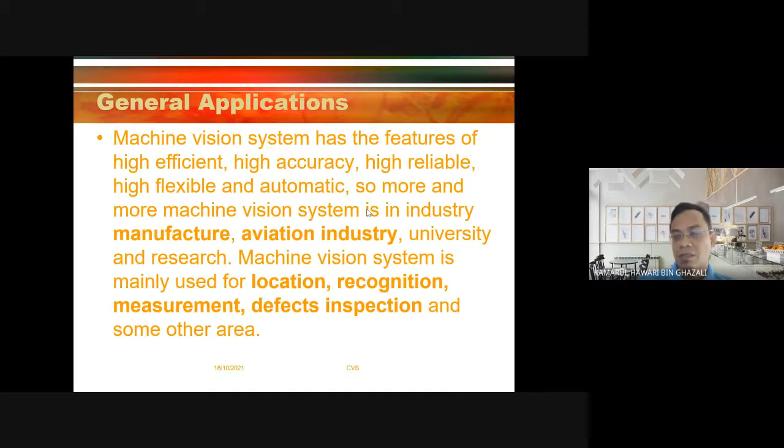So it can be used in manufacturing, aviation industry, automotive, as long as the task is to replace a human eye, there is a place for machine vision system technology. So that is the basic idea of a machine vision system.

So let's take a look at this industry, semiconductor industry. Malaysia can be considered one of the manufacturers, or semiconductor producers, in the world. So during this COVID-19, the products that use semiconductors are having a problem of shortage of the chip, because like in Malaysia, these factories were not allowed to operate for maybe 3 to 4 months.

Just recently, the government lifted the restriction for the semiconductor industry to operate, even not only semiconductor, but all the other essential manufacturers or factories. So during that 3 to 4 months of shutting down the operation, the world faced a shortage of the semiconductor chip, of any semiconductor.

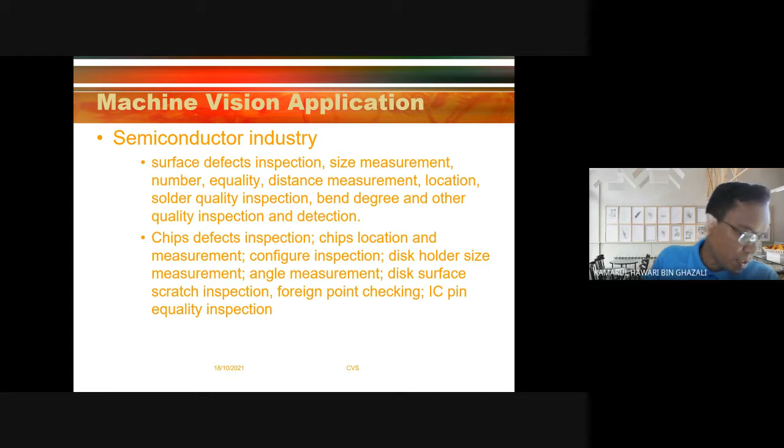Last week, I showed you the glassware, or the plate. The tableware, plate, 'pinggan' in Malay. I showed you last week. In 1 day, for 8 hours, they produce 8,000 pieces of the plate per day. 8,000 pieces, you just imagine who is going to buy that plate, 8,000. Are they all going to eat off the plate or what? But that is the situation, I mean we don't know. Some industries, we have no idea how they operate. But this factory, they're producing the plates, 8,000 pieces per day.

So the majority of their process is manual, because this factory has been operated since 1940, almost 100 years ago, but still alive till now, still makes profit, still people want to buy this product, Claytan. If those like to buy kitchen accessories, so you should know the brand Claytan. But they don't want to go automatic because they still can rely on manual human labor from Indonesia, Bangladesh, India, Myanmar.

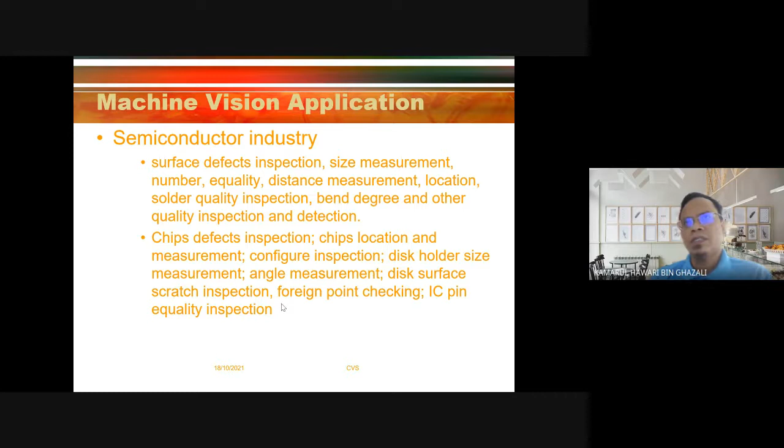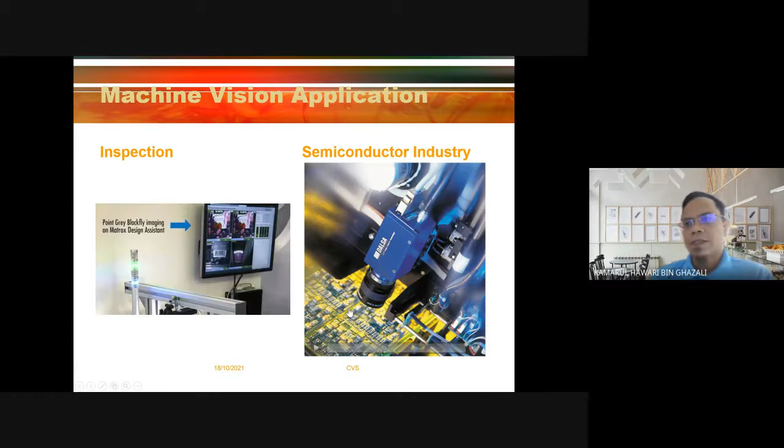So if you look at this video here, you can see - oh, cannot play. So you can imagine this board, a PCB board, right? This PCB board is inspected by a camera, and then very small and tiny defects can be detected by the camera.

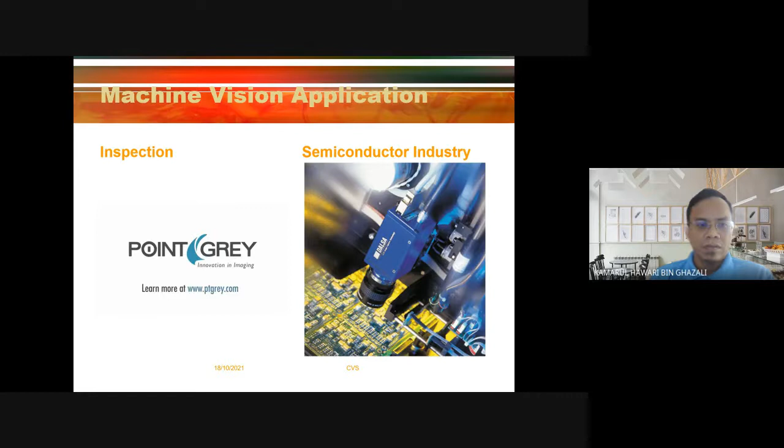So this is another example. It's not only in semiconductor, but since semiconductor is considered a high-tech industry, the factory needs to invest in order to meet the number of products per month, because it is high volume. They must invest in technology, they cannot rely on human labor. You have to have a machine, a robot, any kind of technology.

The semiconductor industry needs to invest. So next is the food and beverage industry. This is also an industry where they have this kind of application. Industries like Nestle - Nestle is very big, they are producing products, so for quality inspection they need to have this kind of machine.

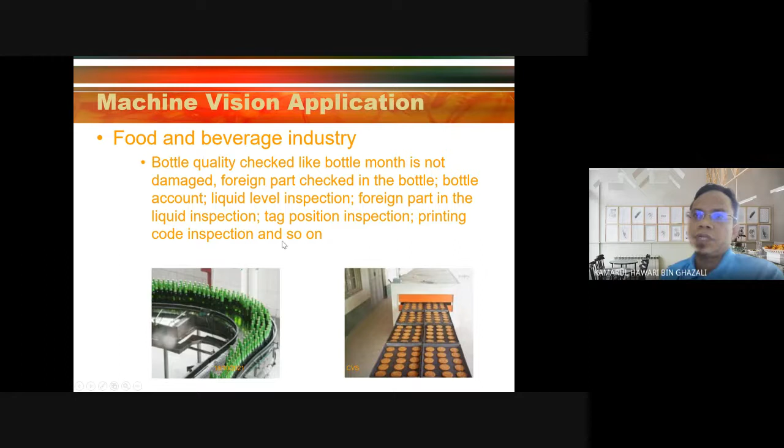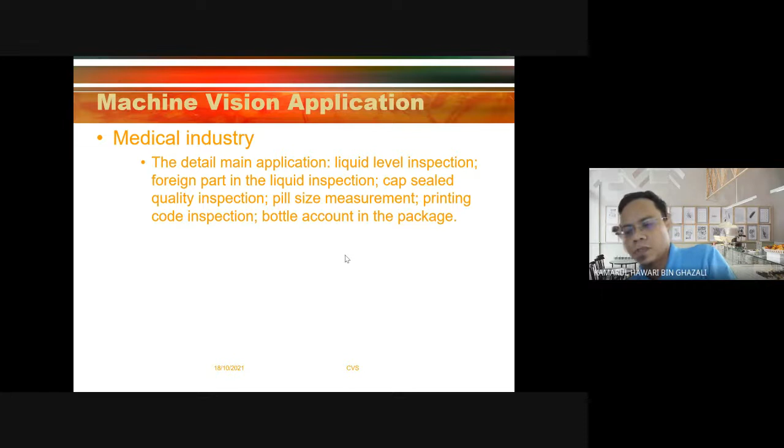So here are examples: bottle quality check, foreign part check, bottle counting, liquid level inspection, cap position, printing code inspection, and so on. In the medical industry - meaning the industry that produces medical and pharmaceutical products - they are also using this kind of machine vision for pharmaceuticals.

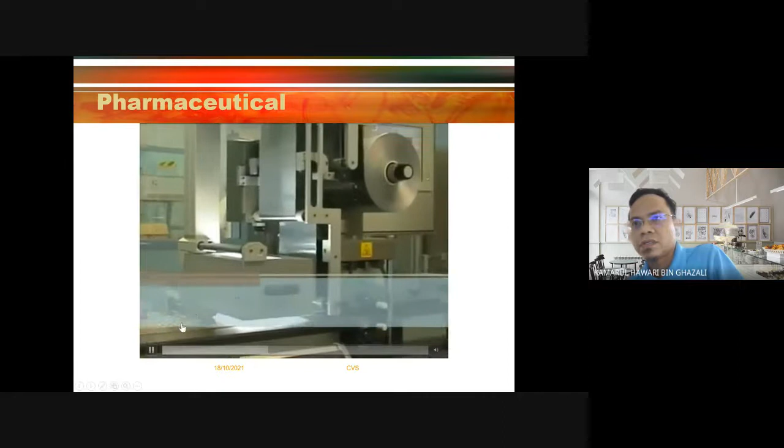So this is the blister inspection system. They do the inspection to ensure that all tablets are in the blister. Why is it very fast? Because they need to produce, for example, in one day 1,000, 10,000, 20,000 blisters. So they need to have a machine or technology to do the inspection. Otherwise they cannot, they will sell low quality.

Since I'm involved with a company in Shah Alam, an automation company, I can see there are a lot of opportunities for industry to use machines because they are still relying on manual methods. But the big international industries like semiconductor, they already use vision systems. The small factory, small medium enterprise SME, for example vendors for automotive, they are still using manual. They don't want to invest, or they don't believe in the technology.

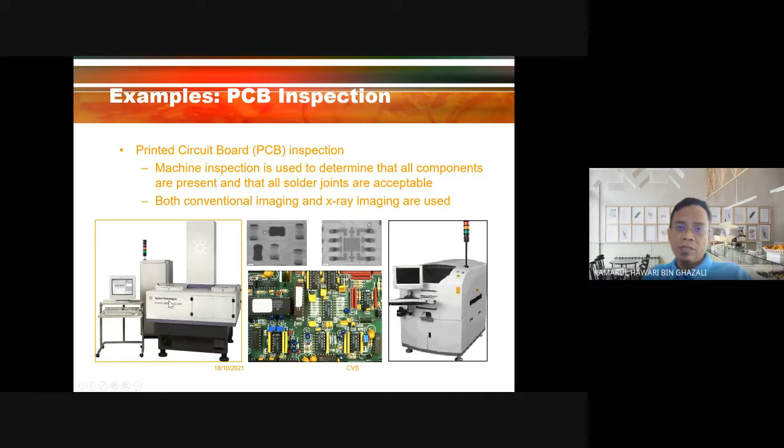Okay, so this is another application. Just now it's application in industry, you can see a lot of applications in industry. Even some industries are still new, or some industries only exist in Malaysia, for example oil palm, sawit. So there is no available technology in the market because the industry is only in Malaysia or Indonesia, right? There is no oil palm tree in Europe. So that's why the technology needs to be developed by the local company.

Last 3 weeks before the border opened, I was invited by Sime Darby, one of the oil palm producers in Malaysia. They called me to ask if I can develop a system to automatically spray herbicide, racun, in their plantation, because they have a labor problem due to COVID.

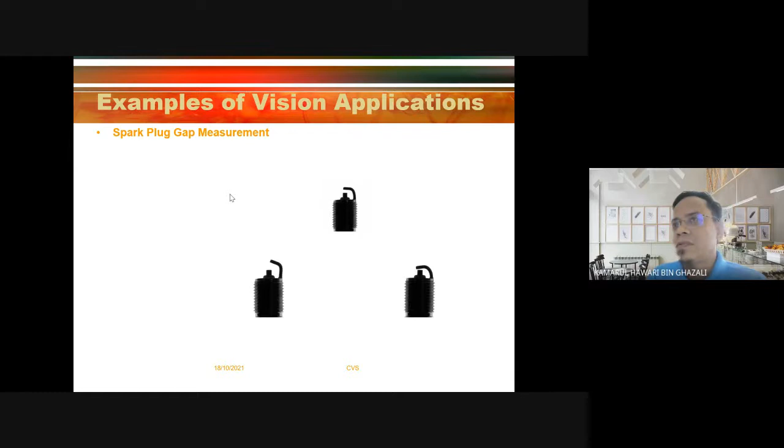But if one day you are working with this machine vision, at least you have something from this subject. So this is another example - spark, detect the gap, PCB inspection. So this is all done by the machine.

So what is the benefit? Of course there's a lot of benefit you can think of by common sense. When you rely on humans, there are a lot of problems: accuracy, productivity, not coming to work, being lazy, and so on. When you rely on machines, machines don't need to rest - they are designed to work 365 days a year, non-stop.

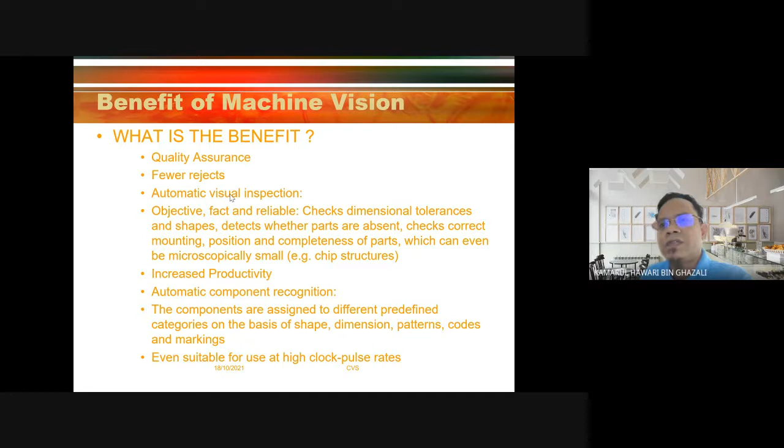So that is the benefit: quality assurance, fewer rejects, automatic visual inspection, increased productivity, automatic recognition, even suitable for use at high clock-pulse rates, and very fast decision-making. Okay, a lot of video.

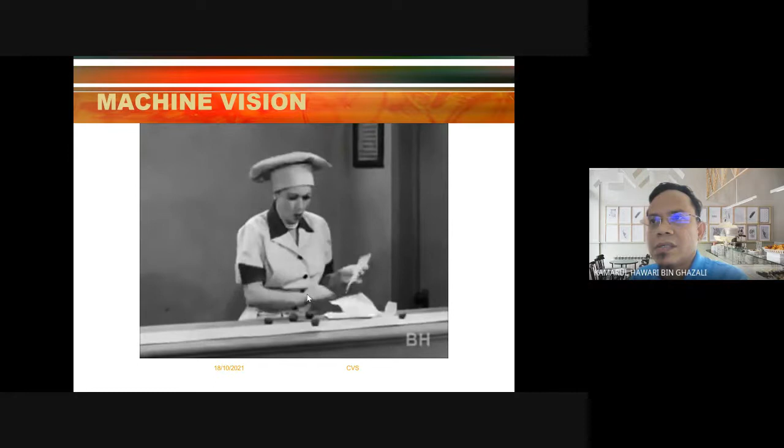So this is another video to show you, to make you understand the application of machine vision. So this is a problem when relying on humans.

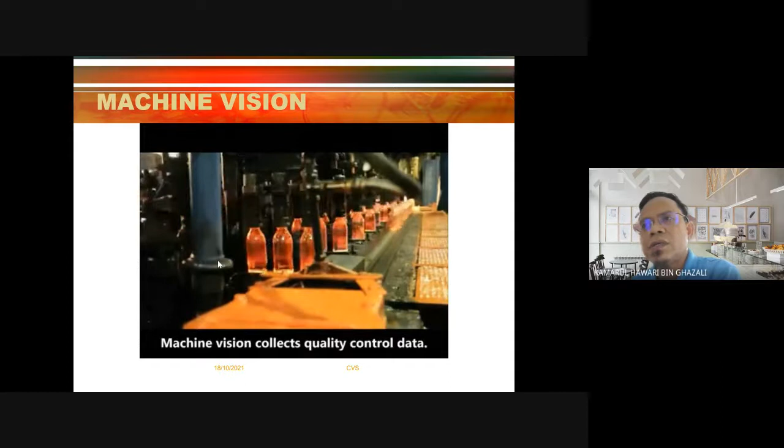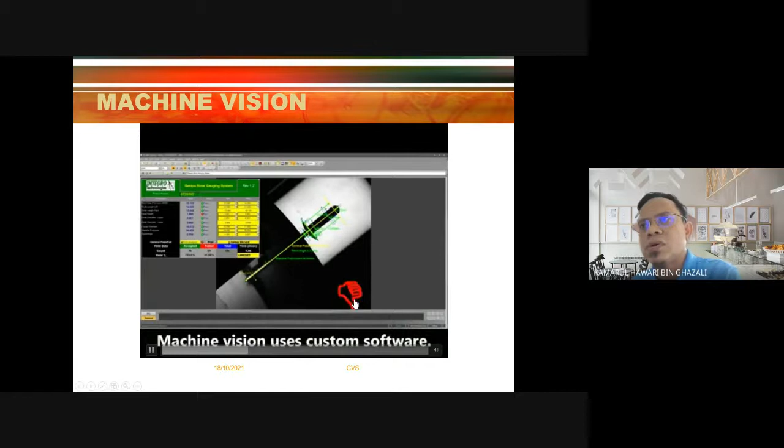Integro Technologies - a lot of companies use cameras, robotics, software. Machine vision collects quality control data. So this is automotive - check and collect: good, not good, good, not good, good, not good. Can inspect labels, labeling.

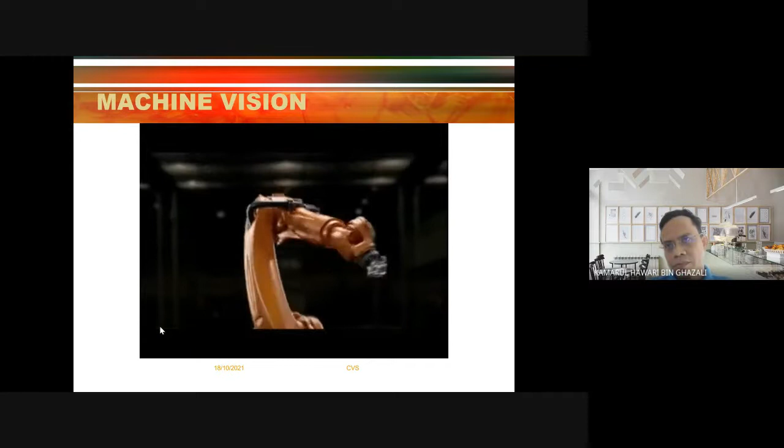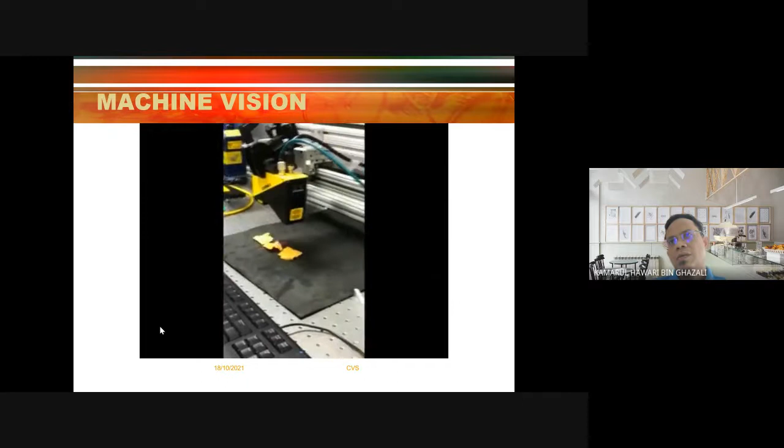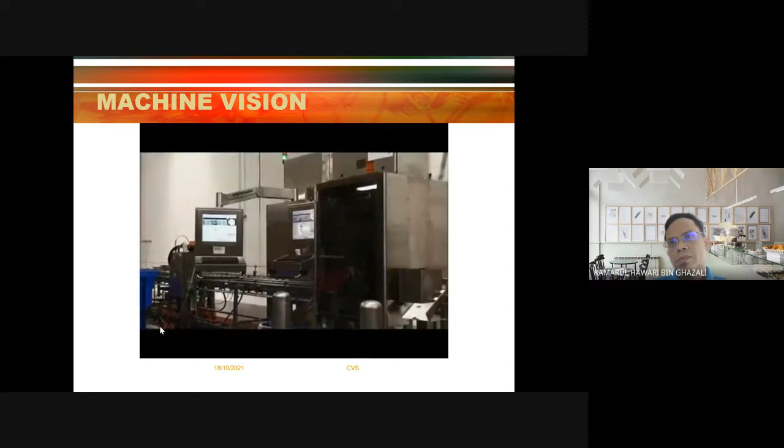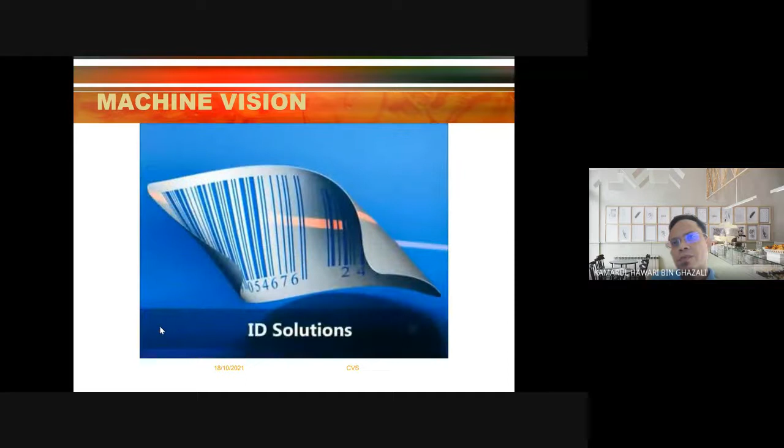So this is a company who provides this technology - Kuka in Germany. So this is an example of what a company can do.

So computer vision is research and fundamental technology for extracting meaning from images. Machine vision is factory application. Embedded vision has thousands of applications: consumer, automotive, medical, defense, retail, gaming, security. So this is in automotive.

In a 2012 study conducted by the IIHS, they found a 7% reduction in crashes for vehicles with a basic forward collision warning system. In automotive, car manufacturers put a lot of vision technology to assist the driver. When you drive, that camera will assist you because humans have a lot of problems, right? So they need technology to assist.

Even they are very lazy now - that's why car manufacturers invented autonomous cars. They want to relax. Okay, so this is in automotive.

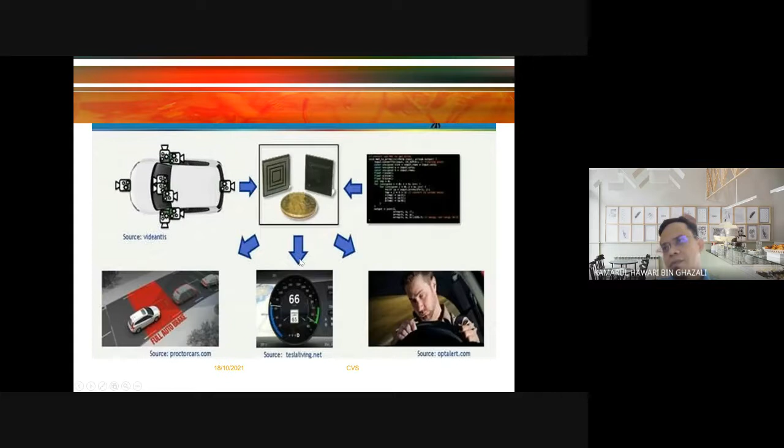Okay, this is the Mercedes punya. You want to see what is the technology in the Mercedes where they use traveling and working at the same time. In the new S-Class, passengers have the option of enjoying a completely new level of comfort.

Mercedes-Benz now offers Magic Body Control, a world premiere thanks to the first ever predictive suspension system. The unique aspect of our predictive suspension system is that we now use stereo cameras to scan the road surface in real time up to 15 meters ahead of the vehicle. This function is known as the road surface scan and truly is a world premiere. We're the first to do this and to do it in real time on board. It's never been done before.

The stereo cameras measure the height of obstacles with a precision of 3 millimeters or better, and at speeds of up to 130 kilometers per hour.

In the second step, the measurement data defining the exact road profile is passed on to the suspension system, and thus the active suspension system knows ahead of time which bumps it's about to drive over. They can adapt so that the body glides far more smoothly over the road than a conventional vehicle. As such, the suspension system can actively compensate for uneven surfaces. This prevents the body from oscillating and vibrating.

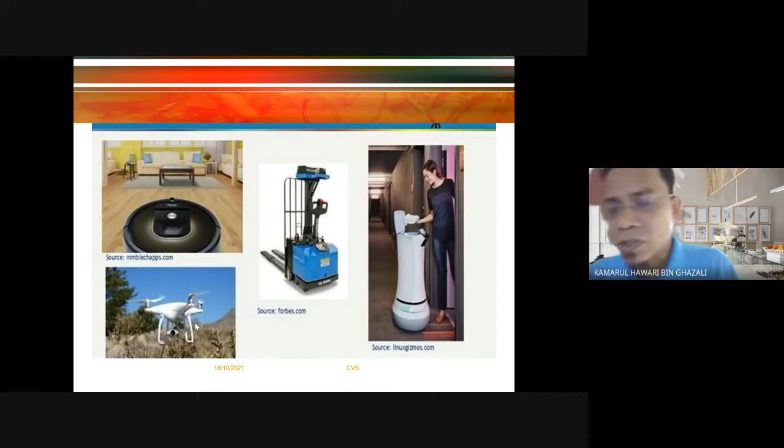So how do they do it? They are still not using the technology of vision and image. They use a camera, but they just use it for manually controlling the camera, or maybe they just use a drone without a camera. They just set the perimeter, the area for the drone to fly and spray the herbicide. They turn on the drone and the spray, and then the drone will fly at the set location or perimeter and just spray, without having information on whether they are spraying the correct target or not - they just spray.

So we can propose a system to make it more efficient, because a drone is normally attached with a camera, right? So the camera can perform like, as it flies, see - oh, this is the location we need to spray, move - or here there is no weed, don't spray.

So how to do it? Image processing: process the image, give information to the drone, then spray. Process the image, give information to the processor. So what next to do? Not spray.

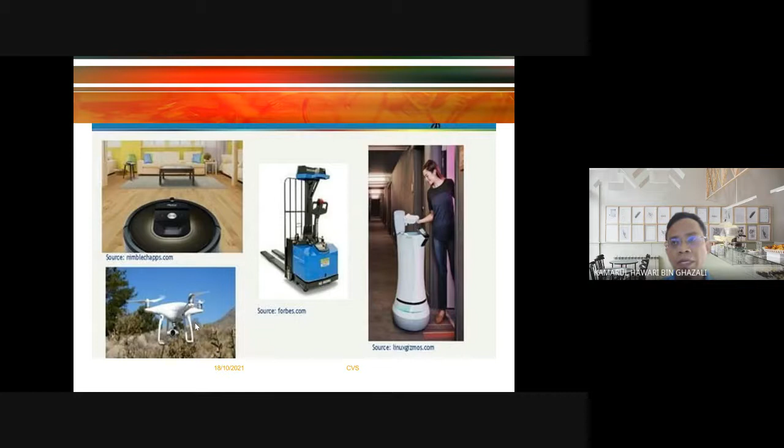So it is more efficient for certain crops, commodities like oil palm tree. Paddy can also be considered a commodity, but paddy is not enough. Oil palm now is 5,000 ringgit per ton, very expensive.

So they spend 30% of their cost on what they call weeding management. Weeding management includes herbicide spraying and fertilizer, to ensure the product meets productivity. Because if they don't have good management on fertilizer or weed management, they cannot get high productivity.

They cannot get the percentage of oil extraction high, because the oil palm fruits cannot produce a certain weight, for example, because of lack of weed management. So they spend 30% on this.

So now they rely on labor, humans, to spray fertilizer, baja, to put baja. But some, because the company management pays very low, the workers are not very efficient, inefficient because of certain problems.

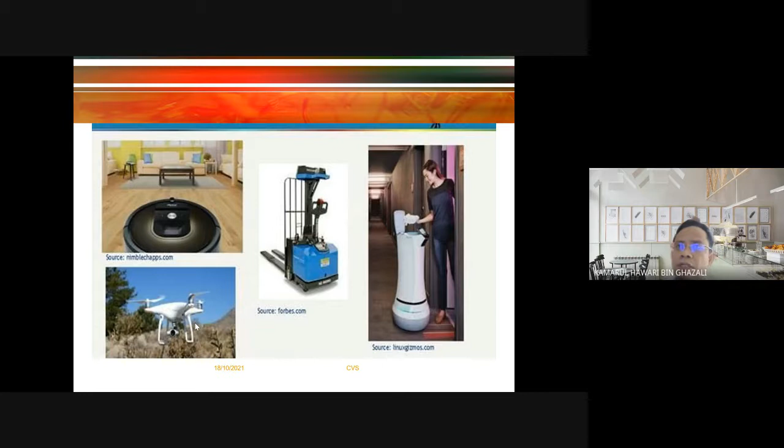It's not only to save money, but also to save the environment, because fertilizer or herbicide is very dangerous to soil - soil degradation - and dangerous to humans too, because the poisoning has a long-term effect. It's not immediate, but after 10 or 20 years the worker will see the effect of the poisoning. It causes soil degradation, and when it goes to the river, water contamination, so a lot of things. It's not only to have profit, but also to save the environment. So that's that.

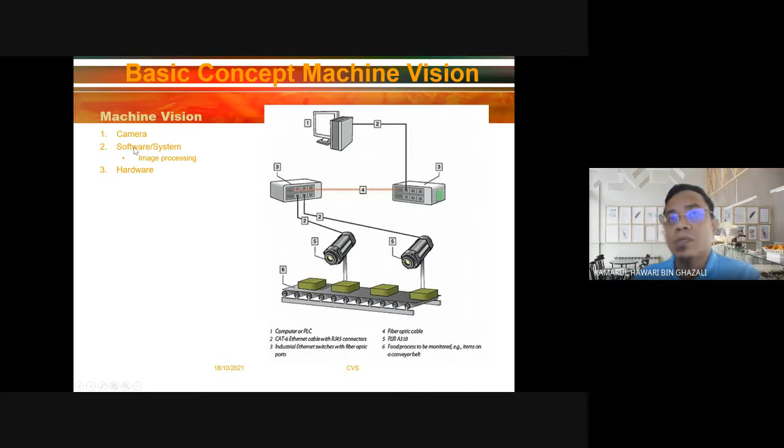So next is software. A vision system includes hardware and software. The first stage of any vision system is image acquisition, which includes the camera and its connection to the computer or processor. The software component is where the digital image will be processed. Figure 5.1.5 shows the general flow of vision - the camera captures the image, sends it to a computer, because there is software in the computer. You process the image in a computer because the computer has all the processing power.

You cannot process it in Arduino. Cannot - you cannot process it in Raspberry Pi either. You have to process it in a computer, because it requires a high specification processor. Can't do it with Arduino. And then the display is just to show the result. Then there's more - interfacing.

One or more digital cameras, monochrome or color, with suitable optics for acquiring images, such as a lens to focus the desired field of view. The image sensor and suitable specialized lenses. I'll explain a little bit here, but there's no slide after this. You have to take note now because this part I experienced myself. I didn't teach this before because I thought it was just a very simple camera choice - you can use any camera.